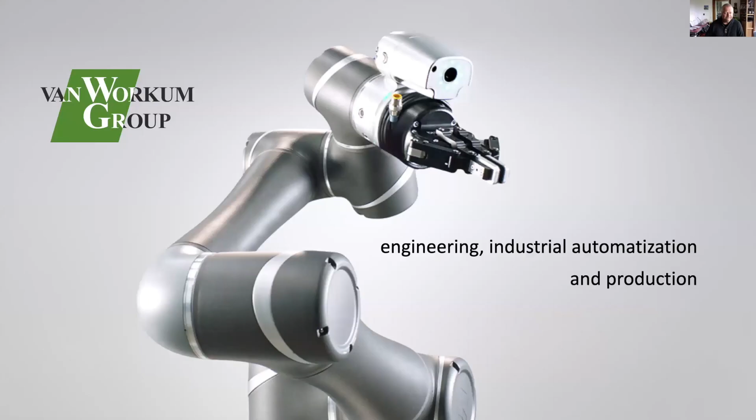Centrium focuses on lean management, Industry 4.0 technology and innovation. Van Workum Group works in industrial automation and production of different specialized machines. This is very interesting, you may have a look at their website.

And ourselves, as Arenz Digital Services - what you can see is a handheld scanner on the left, where we can provide services in industry on the spot. We focus first of all on reverse engineering.

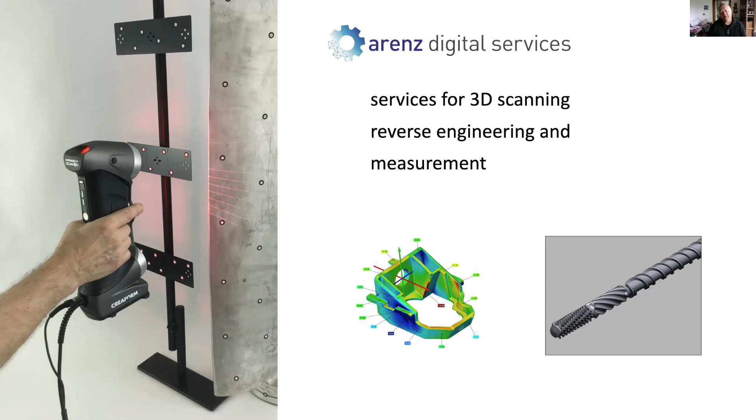You can see this small picture on the right side, where a scanned part is reversed into CAD data, or on the left side is a measurement result, where you can see a heat map of a part we investigate to check if all the measurements and dimensions are fulfilled.

For example, our daily work involves having a point cloud or scan result on the left side - this is a door, and our customers want this door as CAD data because they want to change some items. Actually, the car is from Ford, and nowadays no one can go to these OEMs and ask them for data. You can buy a car, you can drive it, you can do whatever you want with it, but you are not able to get the data.

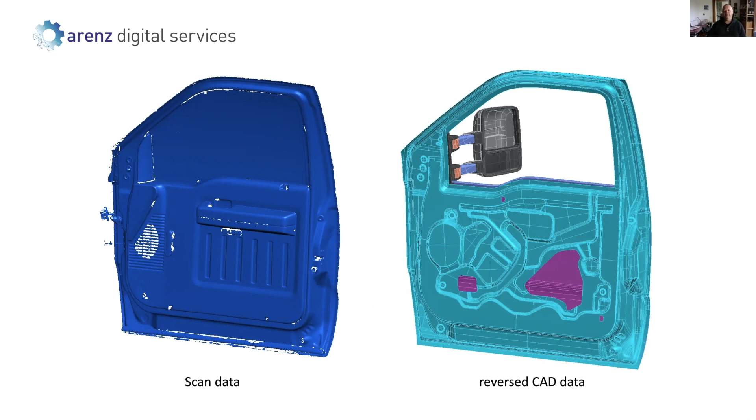So the service we offer is that we can scan such parts, and using our programs, make reverse CAD data which you can receive in any common computer-aided design program and work with however you like.

Actually, you can scan parts of any size. For example, here you see a big Mercedes vehicle where we did a full body scan. It's for the tuning industry - they make a body kit from it, so they need this data.

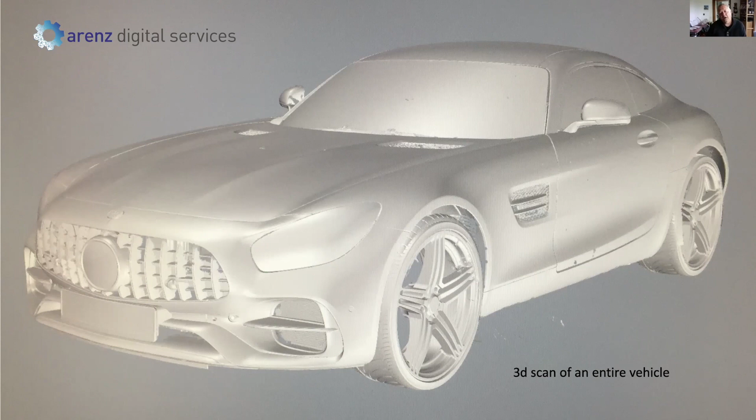We went into a Mercedes shop and asked the general manager if we could borrow such a car to scan it. You see the result as a point cloud, and afterward we reverse different parts from the chassis to give to our client.

The other specification is quality management. Traditionally, you have coordinate measurement machines, which are quite common in most companies. The good benefit is they are very, very precise. Some other, not so good benefits, are that they are completely stationary - very huge and heavy, so you cannot transport them to a spot where the client needs it. And it's quite difficult to use, so you need an expert to set up the programs and use the machines.

This is one of the ideas behind our project. In comparison, a much more modern way is this structured light scanner system, for example delivered by companies like Zeiss or GOM. It is absolutely high precision, and of course also stationary.

You need a lot of material to transport it to customers if you want to use it on the spot. And of course, it's the same as these coordinate measurement machines - it's very difficult to use. You need a lot of training just to set up the machine, and also a lot of daily practice to be sure you fulfill all the specs your client needs.

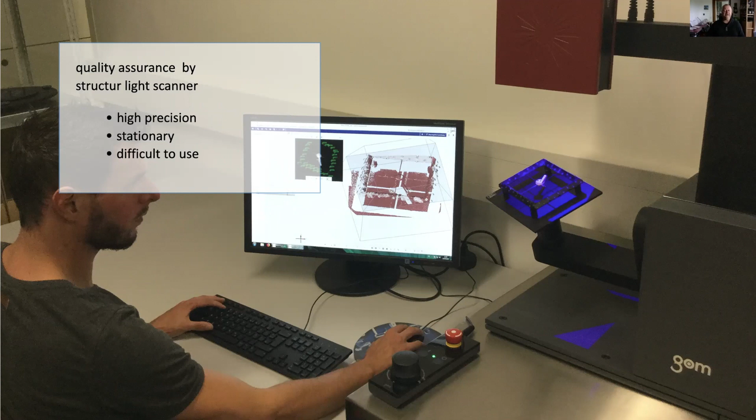The result of the scanners is much more interesting and easy to understand. For example, here's a plastic part which is one of our benchmarks. You see this heat map, where tolerances are shown on a plus and minus scale. 0.3 is red, oversized, and minus 0.3 in blue is undersized. Any area that's green or yellow is within nice tolerance, and you can easily see what you're interested in.

You can also make spot marks, and see all these small flags where the difference from the original CAD data to the scanned part is measured and displayed. It's a very nice way to show the customers the result.

In comparison, a coordinate measurement system is only able to measure one spot, or a lot of spots, but it takes time and isn't as visible as these heat maps. It's just one dot on the CAD data, and even with a lot of table work like Excel results showing plus and minus, it's very hard to understand.

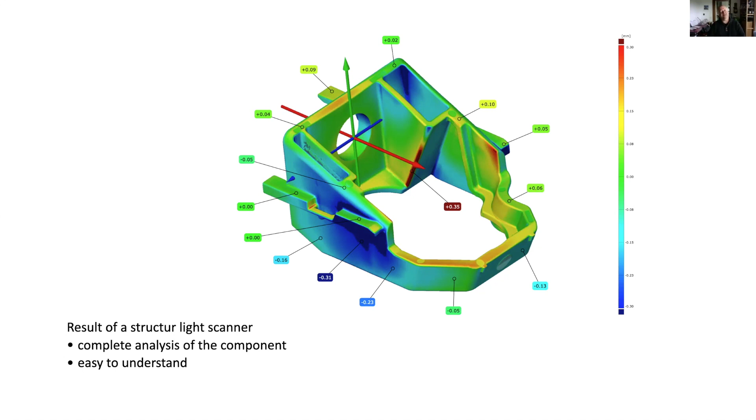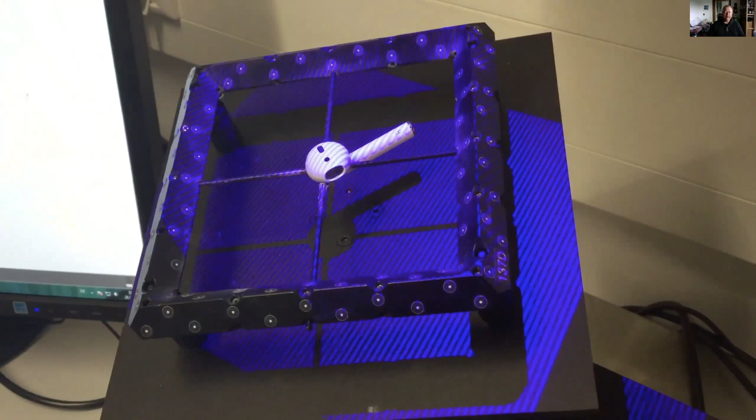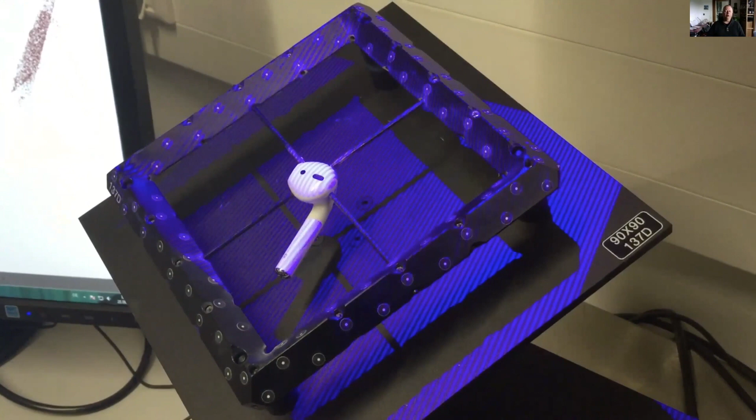What you can see here is how these kinds of machines work. I made a small video. Here's a small earbud from Apple, and you can see this frame and the refraction of light — this is the blue structured light. The machine turns this frame, the holder, 360 degrees at a specific angle, which is programmed in beforehand, so you can scan the earbuds from both sides.

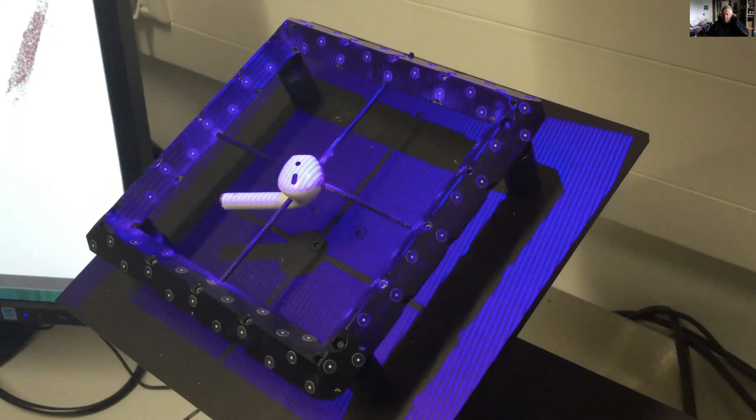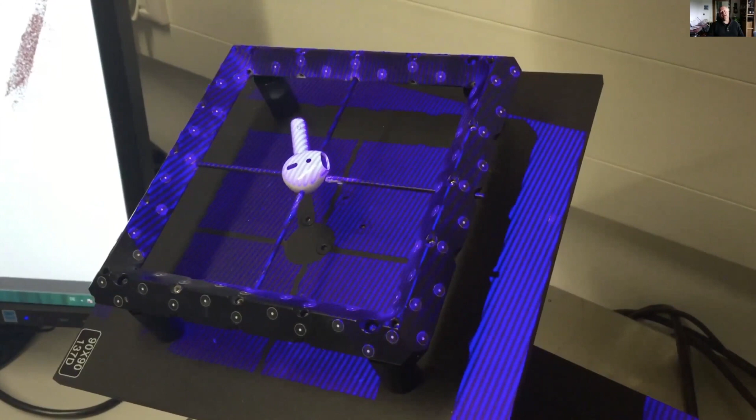The frame is turnable — you can turn it 180 degrees around, so you can scan both the back side and the front side. The scanning software is able to match any single scan into a full volume, and afterward you're able to compare it with the CAD data in the measurement program to get all these results.

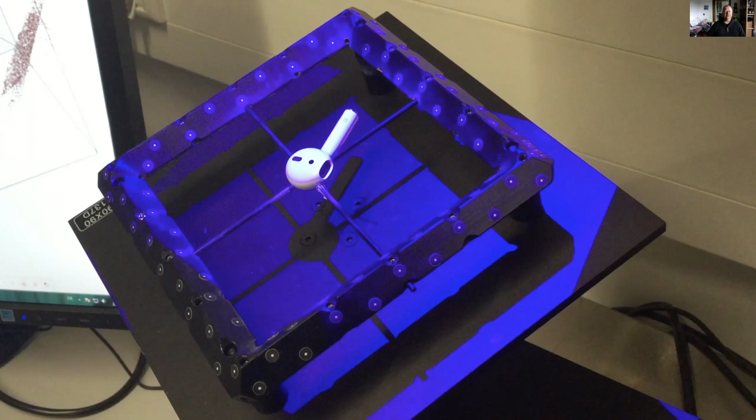Regarding measurement accuracy, here's a tool head from a lathe, maybe 9 millimeters big, and you can see how accurate the scanners can be — we're talking about a minimum of microns. When you look at this structure on the surface, it's just a kind of light irritation, it doesn't mean the surface is really rough.

This is more a mathematics problem, bringing up areas, roundings, cylinders, and cones into the structure to get the right results. You can even filter the point cloud and it looks much better, but that's just a visual effect. The accuracy of these kinds of parts is really dramatically high, and it's getting better and better.

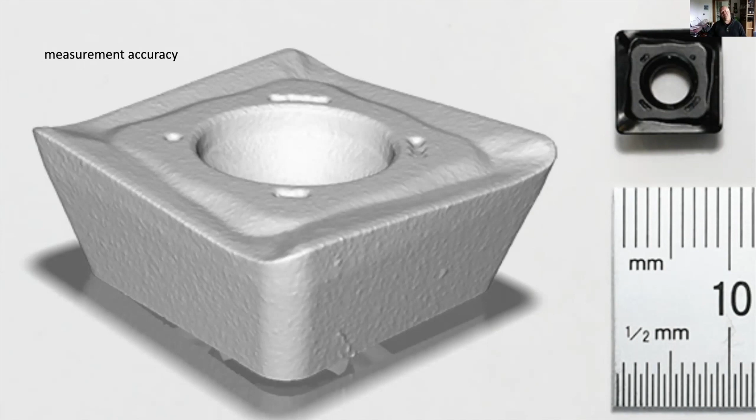So we can reach at least the specification of coordinate measurement machines, but you get a full volume, not just spots on the surfaces. And there's no limitation in width or size.

Here's a big cast part measured by these machines. You have a structured light scanner on a tripod with a scan square of maybe 0.5 meters, and you go step by step over the whole surface. The software matches the whole geometry together into one big volume, and then you can go for reverse engineering or measurement.

The aim of our project is to look deeper into these typical production processes. Our clients mostly have the problem of seeing, for example during a night shift, whether a part produced by injection molding, casting, or any other production technology fulfills the specification given by the OEM.

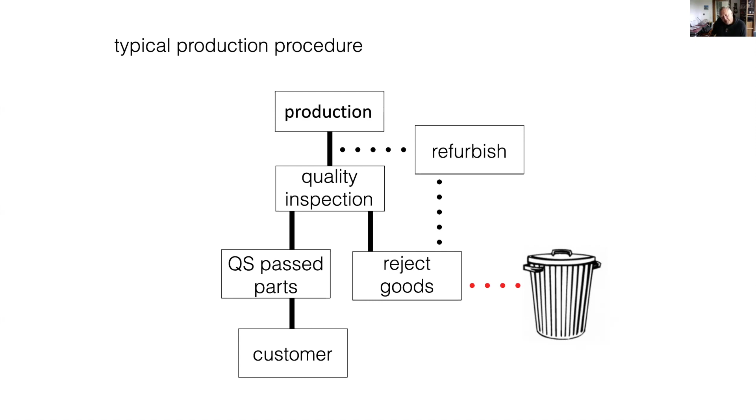This leads us to our concept, what we like to do. It's a nice story to have this kind of program by Interreg to get money to build up a prototype and to test it. The basic idea is that we have a machine which is very easy to use, so we can load the component, and we have a measurement process which is taught in. The machine should be absolutely easy to use and operate.

It's scanning by a structural light scanner which we've introduced, and we investigated which kind of quality management program can be used. We found, for example, Polyworks, which is quite common and, in my opinion, a leader in this kind of technology. We have a nice connection to a company in the very south, who are the dealers here in Germany.

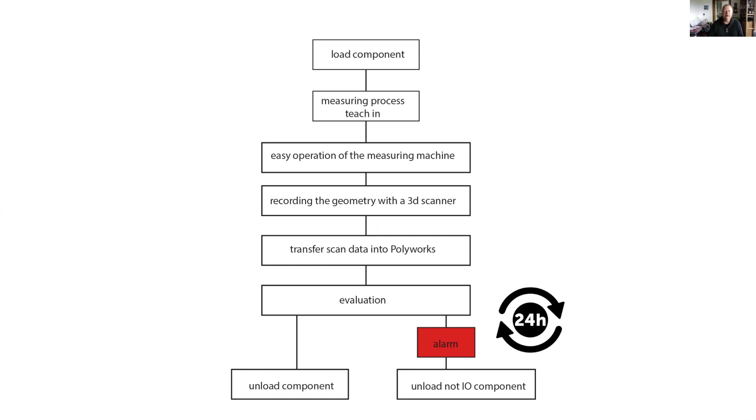This is what we did. This is a very huge machine. If you go through the specification, we have a turntable which is around 1000 millimeters in size, and the weight of parts can be up to 100 kilos.

The whole cabin is closed, so we have the possibility to use laser scanner systems too. We have a laser scanner system in our collection for testing, and this is a class 3 laser, which can't be used in open surroundings.

So the area of the scanning field is completely closed, and for the structural light scanning system it's very nice that the ambient light stays quite equal. After passing the parts into the system, the doors close automatically and the investigation starts. If the part passes, the door opens and the workers take out the part.

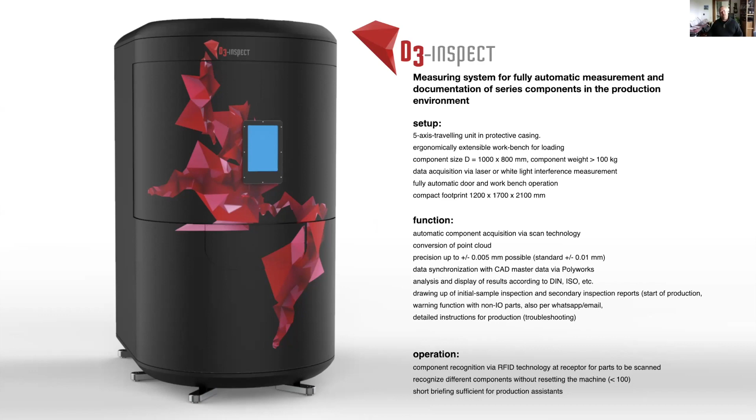Internally we have a mechanism with 5 axes, so we can go up and down, forward and backward, sideward, so we reach any area of the parts to be scanned. In front of these tips is the scanning system with 2 cameras and a beamer system.

For unloading and loading, there's also the possibility to drive the whole turntable out of the machine. Everyone who knows, for example, a CNC milling machine knows the problem that workers have to go more or less into the machine to fix it, to manipulate the parts placed into the machine.

Our idea is to drive out the whole turntable, for example to feed it by a robot, or you can go with a forklift over it, or even the crane system of the company can drive there and load the part onto the turntable.

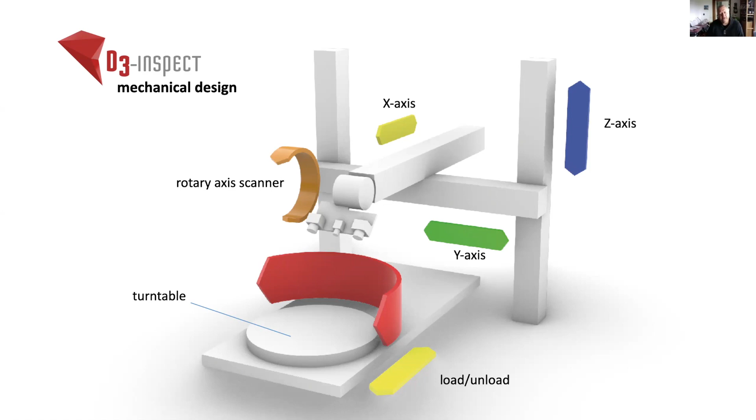You must always remember 100 kilos is not a weight a worker lifts by himself, nor is it wise to do it with 2 or 3 people by hand. So you might use a forklift or something else to place it.

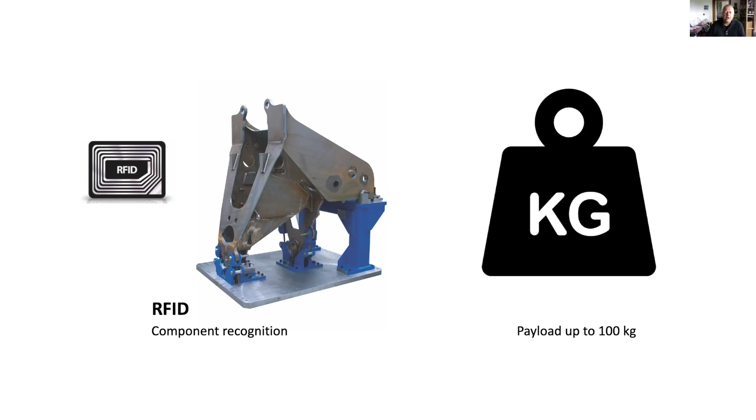So, for example, what you have to show the workers is a blue, a green, or a yellow holder for these maybe 3 different parts, which is made in the night shift. And even the holders are designed in this way that the fixing of the part works just in one way, so you can pass these holders into the machine.

There's a lot of different ways you can report it, and you can see also 2 non-OK examples where we can filter out, because we are only interested in the measurements which are not okay.

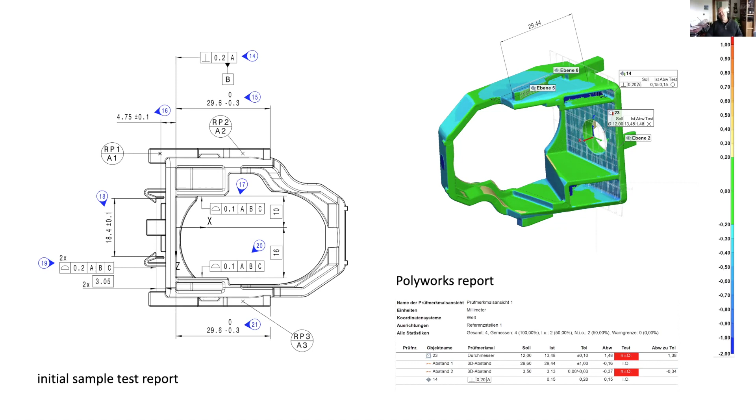And so there's a kind of string in the program which gathers all this information and sends it over to a kind of website, and gives, maybe with an SMS or with an email, an alarm to a specific person given to the program. Then an alarm, maybe in the night shift, comes to the responsible people, and he can go and have a look at his computer, see such a report, and see what kind of mind he makes up to decide what's going on with the production.

So this is my slide for this day and night report, 24 hours, which can be solved by our program.

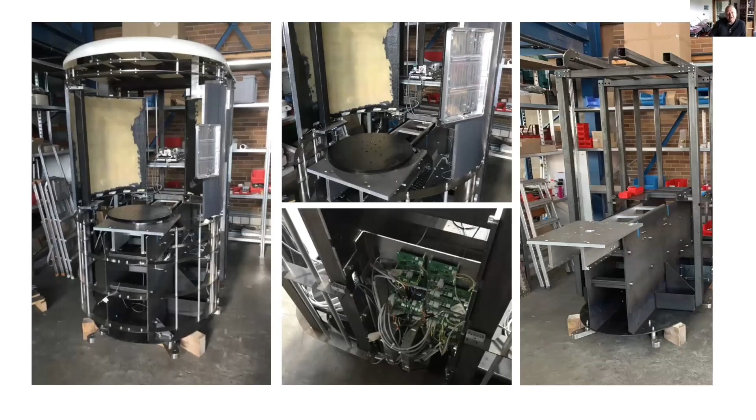So the prototype we did, I have a lot of photos wide open. For such a pity, we had an accident in the last days: the electronics were broken by a wrong cable, so it's damaged. And what I'd like to present was a video, but it's not able to make a video now.

This is the mechanical prototype, which is built up in Velbert, and here is also the scanning system installed to make such scan investigations by geometry.

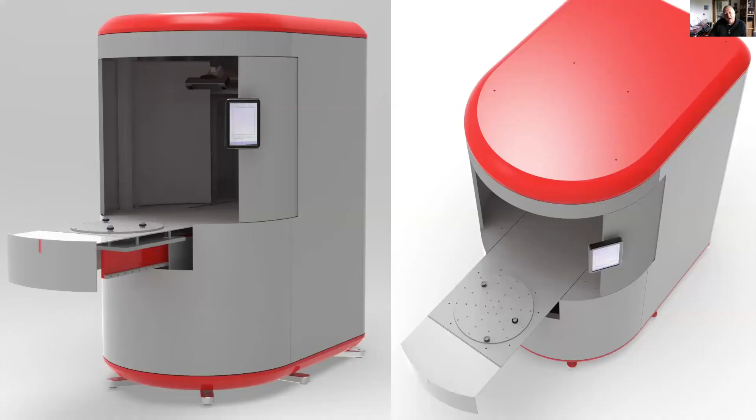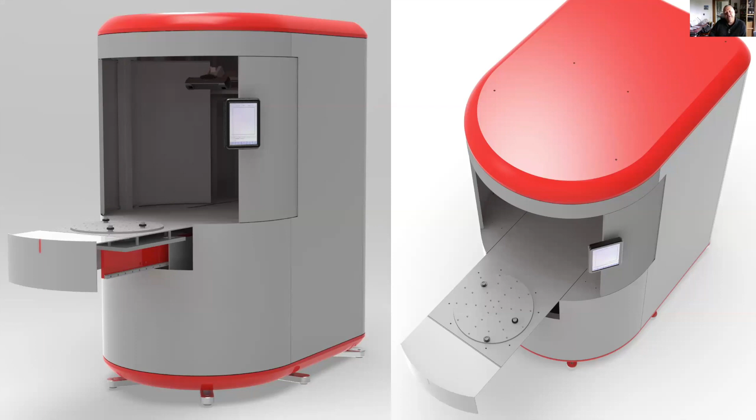I did some computer renderings where you can see the touch screen on the doors, the possibility to drive out the door with the turntable, and to load and unload the machine. This is more or less the result of our program, and I thank you for your attention.